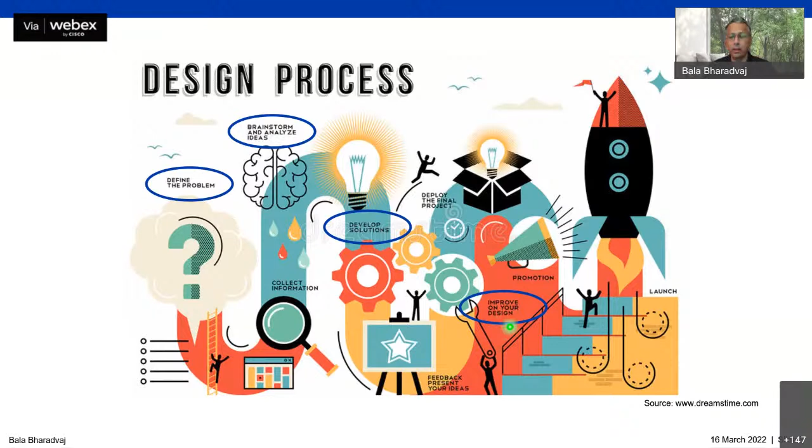Now, if you break that down further, when you say define the problem, what does it mean? How broadly or narrowly do you define the problem?

If I go back to the aerospace industry, early airplanes were designed more to deliver mail. There used to be mail delivery by stagecoach and horses and so forth. So they said that takes too long. If I make an airplane fast enough, which can travel maybe five times faster in those days compared to the horses, I can deliver the mail.

So the problem was defined as, I want to build a machine that will carry mail. Well, it's okay, that can carry some passengers too eventually, but carry the mail so it will go from place A to B. If that is how you define the problem, you ignore all the sustainability related issues. They say, yeah, I know it creates pollution, but that's okay because I can go there faster, and it's only a small amount of pollution, or whatever.

But today, knowing what we know, how broadly you define the problem will define what kind of solution you get. And in the context of sustainability, sustainability needs to be included in the problem definition.

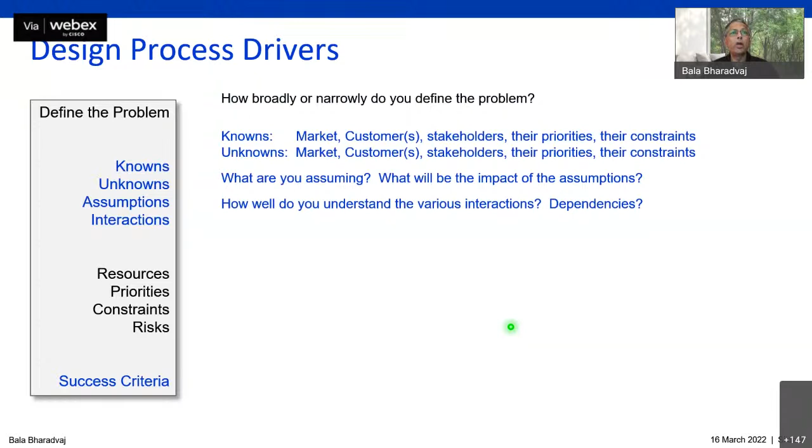Of course, there are knowns and unknowns related to the market, the customers, stakeholders. I'm saying stakeholders because the whole world is a stakeholder when it comes to environment and sustainability and so forth. And their priorities may not be the same as your priorities. As a business, as an engineer, you may have certain priorities, but that doesn't have to be the same for other stakeholders. So it's a combination one needs to understand.

Of course, everybody has constraints. They have constraints, we have constraints. We make assumptions, especially for things that we don't know. Do we think hard enough, long enough on the impact of the assumptions? If I assume something, it may be very convenient for me now, but do we really understand how things might unfold? How well do we understand the interactions and dependencies?

With respect to sustainability, if I make a better airplane, what is the impact on, say, the environment? If I come up with better software or a different way of doing things, what is the dependency? What else does it depend on? What depends on it?

Of course, we have to think about resources, and I'm using resources in a very broad sense. People are our fundamental resource. I'll talk about this again later. Knowledge, what do we know? How do we translate that knowledge into some applicable things? Technology, tools, when we talk about digital ways of doing things, tools become extremely important.

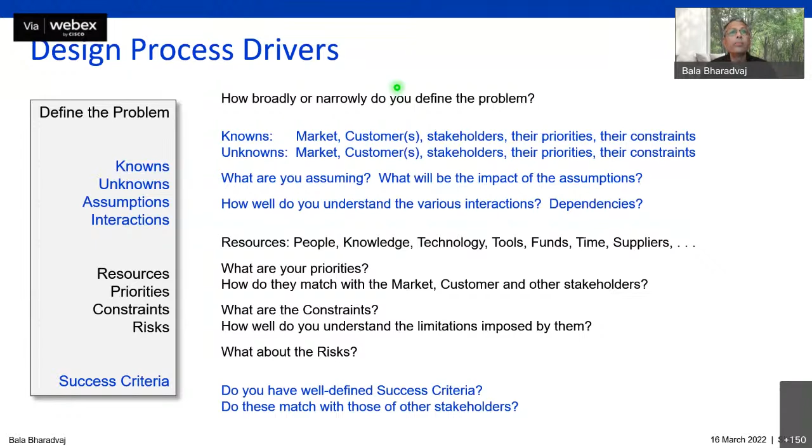Historically, from the early years, 1900s till about 2000, the process has evolved. Initially, it was just get the damn thing to work. Then we said, hey, I can develop commercial vehicles, military vehicles, all kinds of things I can make, which is what happened in, I would say, about 50 years or so.

And then people started realizing, oh my God, these things are getting very expensive. We got to find a way to manage the cost. And that is where we started talking about not just mission performance. We started talking about cost as an independent variable.

In fact, there are papers, cost as an independent variable. You can go look it up, and people started saying, we cannot just make something and say this is how much it costs. You have to factor the cost factor.

And then later on, people said, cost is not just the cost of making it the first time or making 200 of them the first time. You have to think about how you're going to maintain it over the long haul. So cost now became not just acquisition cost, but the total life-cycle cost. I acquire it, I maintain it, and then I have to dispose it. So I have to factor in everything.

And today we are talking about sustainability included. Now, sustainability inclusion doesn't mean all these things go away. You still want to achieve mission performance. You still want to achieve cost goals. Now you also have to think about sustainability and factor that into the mixture.

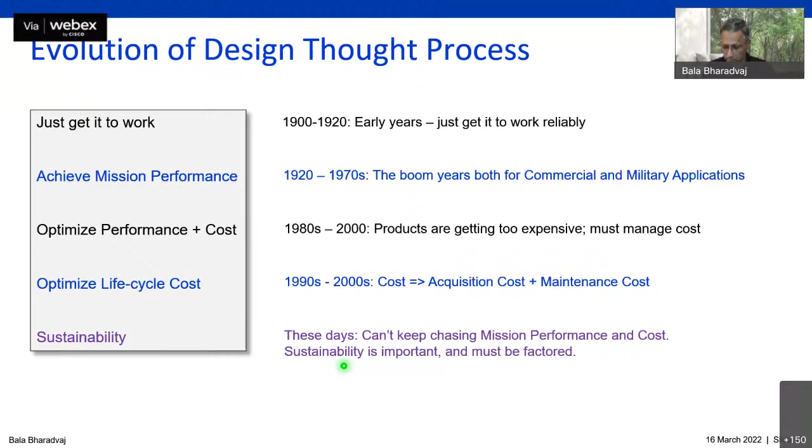So when you talk about the design performance, we talk about these things. So there are many things that come to my mind. You need to think about the system view of the environmental impact, for example. What kind of a configuration are you going to choose? Because the configuration determines how effective it might be.

What materials do you use? There's a huge effort in the industry to replace these toxic metals and heavy metals with alternatives. Where are your materials coming from? Are they coming from some place? Are these rare materials which are destroying the environment in the way you procure them? You get these materials out of the earth.

Recyclability, of course. Where is your fuel source? People talk a lot about using not petrochemicals, but let's say fuel that is made from plant sources, because they say the plants I can renew. But even then, you are still emitting. Whether I burn fuel that is coming from petroleum sources or from plant sources, I'm still creating emissions. So it has to be thought more holistically.

In the manufacturing process, we create damage to the environment. Mining has to do with sourcing of materials, and then of course all these things cannot be ignored. So it gets complex.

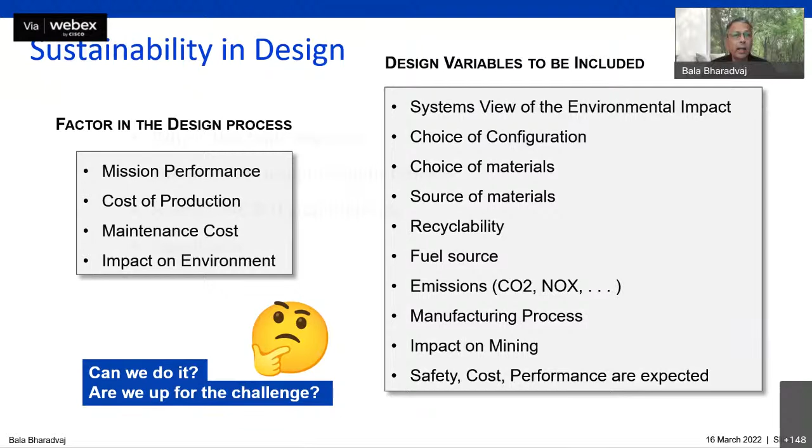So can we do it? I think we can. So let's talk about CAE.

CAE has come a very long way from say 1970s and 80s. We have aerodynamics, for example. We used to do a huge amount of wind tunnel testing. Today, people don't even talk about aerodynamics. Yesterday I was in a meeting, and every time the idea of, hey, is this aerodynamically correct? Immediately the answer was, oh, we'll get a CFD analysis done. So it's almost like people are not thinking aerodynamics anymore. People are thinking CFD, which I think to me is a caution.

Aerodynamics is a fundamental physical phenomena. CFD is a model of that physical phenomena. It has definitely helped reduce the number of wind tunnel tests that we used to do, but then the physics is getting out of our heads. The physics is getting replaced by tools and numbers.

Same thing with structural design. Huge amount of benefit from structural analysis tools. Cockpits and control systems have all benefited hugely from the models and digital multifunction displays and so forth.

Same is true in the area of propulsion. There used to be a time when it was more of an art than a science. Today, of course, it leverages many of the tools from the digital side, from the computer-aided engineering side.

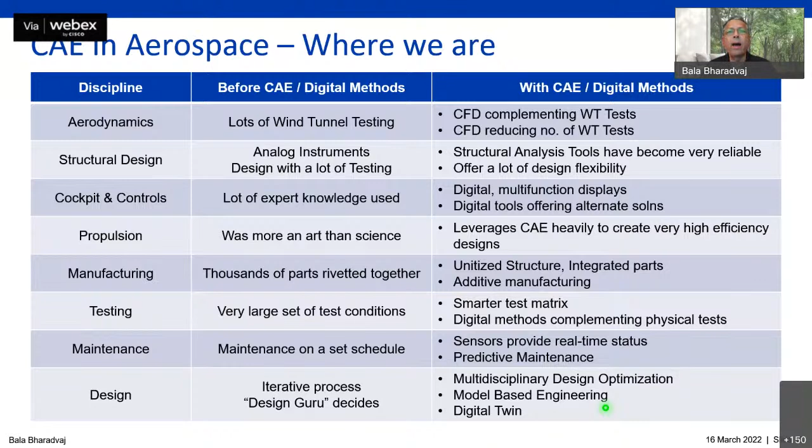Today we are talking about model-based engineering, digital twins, and so forth. But the question that comes up in my mind is, are these models we are creating factoring in all the key things that have to be factored? That's the concern I would have. We've come a long way, but there's a little nagging concern in my head. So the good news is, can CAE come to the rescue and help us out in this area?

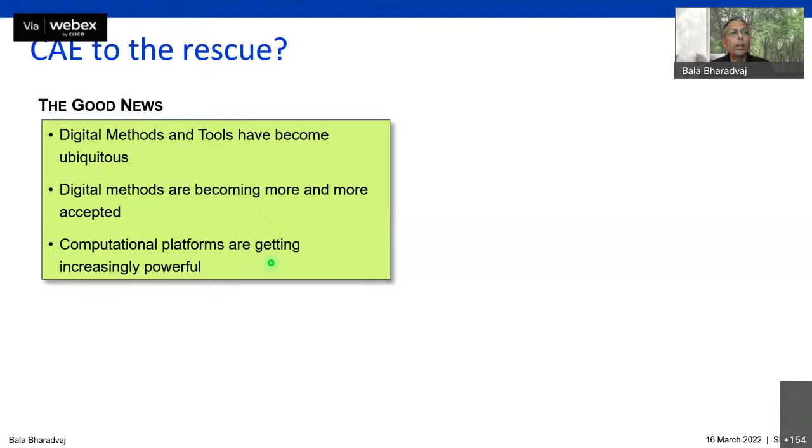I think digital tools and methods have become ubiquitous. Everybody uses them now. It wasn't that way, but they have earned their way and become more accepted over the decades. The good news is all these required computing platforms have also become increasingly powerful, whether distributed computing or cloud computing. The computing power available today enables us to do things we could not do even 10, 15 years ago.

Now, the caution I will leave you with is that it is crucial, it is very, very important, that these tools are reliable. And when I say tools are reliable, it's not only the tools. Of course the tool itself has to be reliable, but it's a combination of the tool and the user. It's also how extensively the tools have been validated, under what kind of conditions. Have you simply looked at simple conditions which people understand? Have you looked at complex conditions? Do you have proof that even in complex conditions it works?

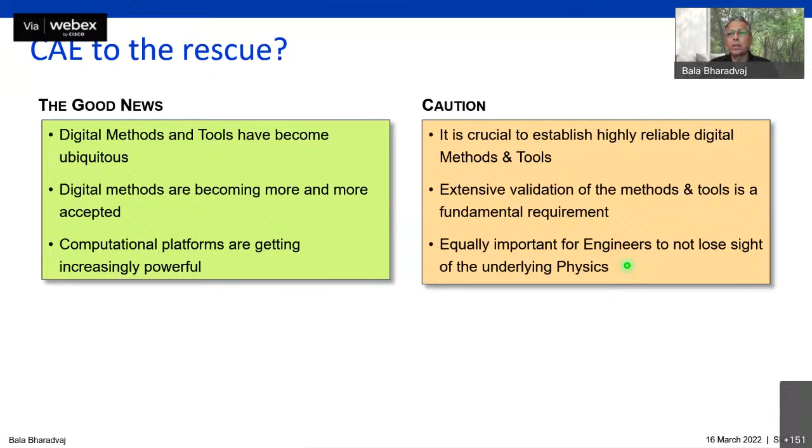Tools alone don't design anything. It's a combination of people and tools, along with the process, that designs things. So it's very important that engineers do not lose sight of the underlying physics. Use the CFD, use the design tools you have, but don't forget that CFD is a model for aerodynamics. Certain things can be modeled easily, certain things are very, very difficult to model. One needs to always keep this in mind, that you should not lose track of the physics.

So my observation is that a good engineer can create an outstanding design even with simple tools. However, if you are a mediocre engineer, you can actually ruin the design even if somebody gave you the most fantastic tool. So while the tools are very important, the engineers are even more important.

So those of you, especially younger engineers, don't come and say 'I know how to use this tool' - that's wonderful, but that's not the sufficient condition. That's a necessary condition these days, that you know how to use a particular tool. The sufficient condition is I not only know how to use the tool, but I understand what this tool is telling me. I know how to look at the data, I know how to extract the kind of information, I know what questions to ask when using the tool, so I can extract that information with the help of the tool.

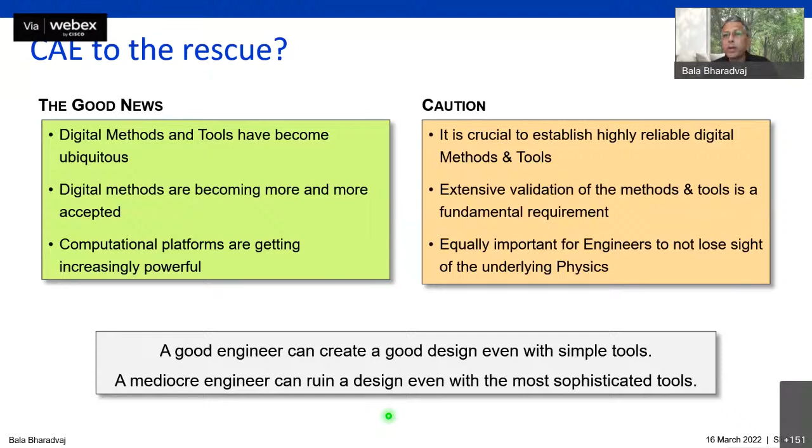Last chart - sustainability is becoming a requirement in aerospace, definitely. Digital methods and tools offer a way for us to tackle this, but I can't re-emphasize enough the importance of the people in the mixture. They must strengthen their insight, and insight is something that develops over time. So whether you are an individual engineer or an organization with engineers, it's very important to figure out ways to develop that insight, because the tools will help you, but eventually the buck stops with the human being and not with the tool.

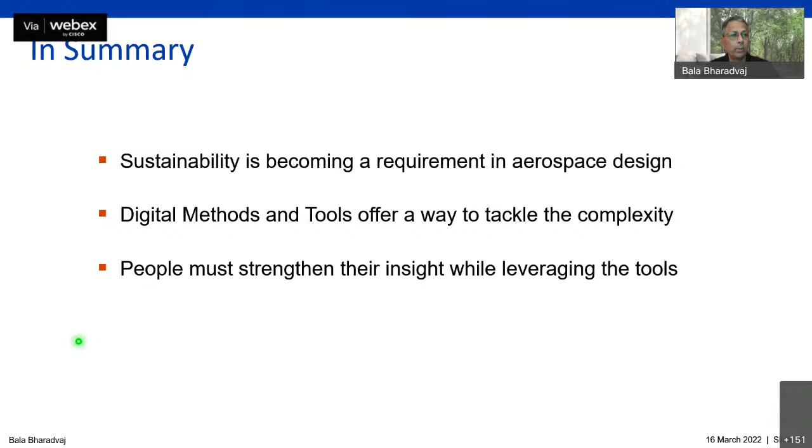With that, I will close this presentation. Thank you again for giving me the opportunity to speak. I don't know whether we'll have a chance for Q&A - it may not work right now, but I will be around if there are questions to answer. Thank you very much.

Seeing my screen now? Yes, it is perfect, doctor. Yeah, go ahead. Apologies, yeah, thank you for stopping me.

The impact of humans on the environment has been well quantified, and it manifests in different considerations, from temperature increase to pollution to water issues and global warming. But when we look at what impact commercial aviation has, it is a small piece of the pie, but a significant piece, and that's what we're zooming in on today to see what we can do to mitigate that impact.

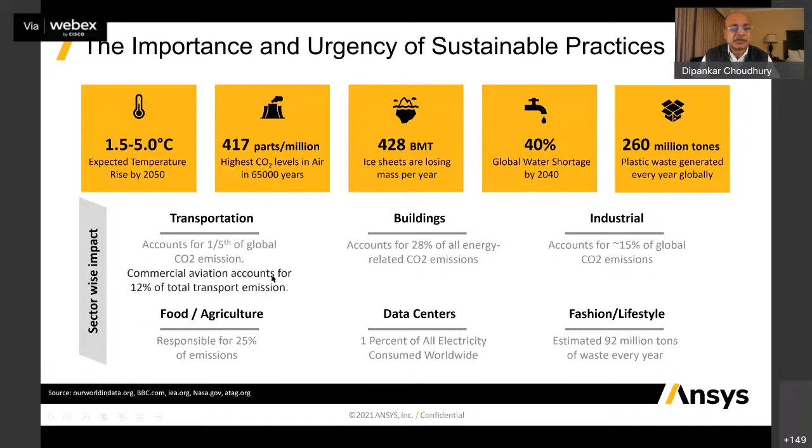The aviation industry, as Dr. Bharadvaj pointed out, is very keen to deal with sustainability as a root issue right at the design phase, because of the benefits in transportation that result in more and more use of planes, which in a not-so-virtuous circle produces more waste, more pollution, more greenhouse gases. So when we try to drive towards net zero emissions by improving efficiency, while keeping our eye on safety and reliability, the challenges become very complex.

They do not—is somebody getting audio feedback from somebody else? Okay.

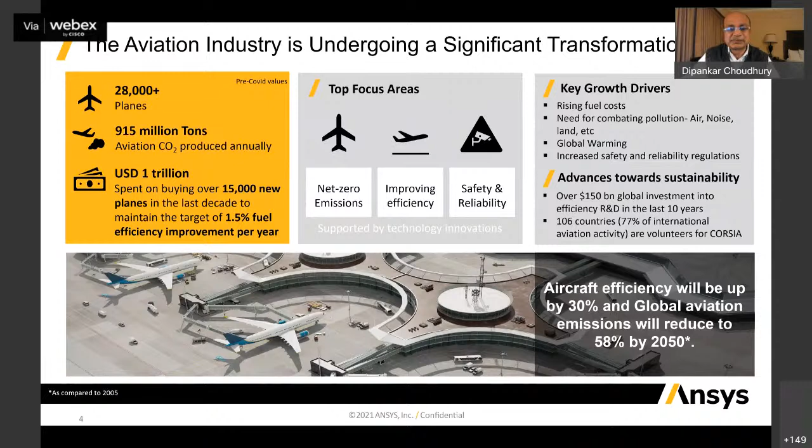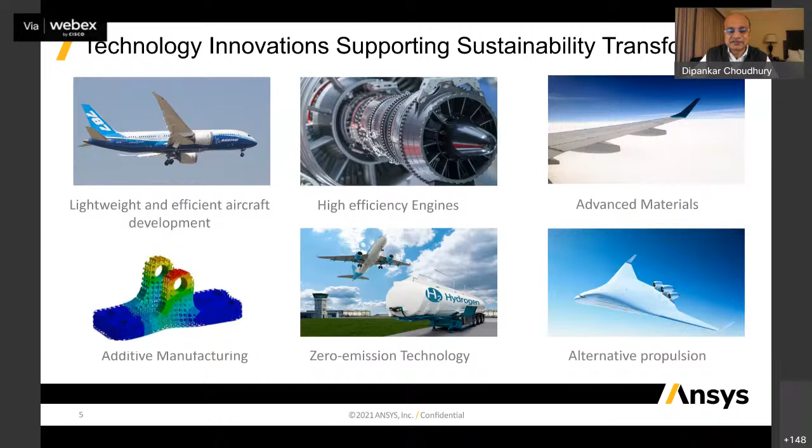Thanks. The goal we have set ourselves as an industry is to improve aircraft efficiency and reduce emissions simultaneously. That's quite a steep challenge, but it's clearly in our minds. There are six or seven ways one can directly impact that, and that's what our customers and partners are working on: efficient aircraft designs including lightweighting, high efficiency engines, advanced materials that play into virtually all aspects of aircraft design, more efficient manufacturing methods, technologies that result in lower emissions driving towards zero emissions, and very radical propulsion methods and designs that are somewhat futuristic. Conceptualizing, designing, and developing these futuristic alternatives is a little bit far off, but even today all the practices I've described are having an impact.

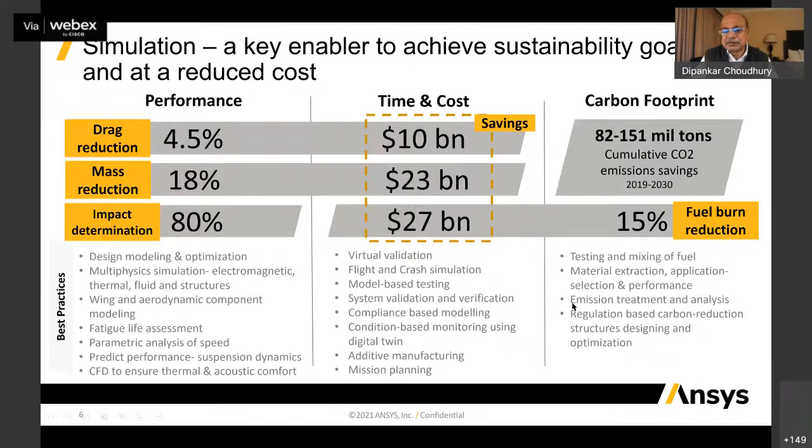Okay, I'm going to skip ahead. I think you know about Ansys—we are a premier simulation provider, and the tools and methods we have invested in over the years have grown from the discipline areas of structures, fluids, electromagnetics, optical physics, and design methods and photonic simulations to supporting methods that can be looked at from the point of view of optimization, digitization through production of digital twins, safety and embedded software, the very important aspect of materials—not just the data but the management of the data—and then how it manifests itself into solutions and industries.

I want to turn to the last part of my presentation and show some examples of the effective use of engineering simulation methods in different domains within the aircraft industry. One clear successful application is reducing environmental impact of noise, through a bunch of tools—not just computational fluid dynamics, but also linking it to noise and vibration analysis in structures, and then translating the simulation data into human audible simulation that can actually be perceived by our ears. These innovative simulation methods, based on the power of the methods themselves and the platforms that Dr. Bharadvaj also pointed to, have resulted in many benefits throughout the industry. You can see some of the benefits listed and quantified, with some quotes here. To the right, you see some typical applications of engineering simulation to landing gear and other aircraft systems.

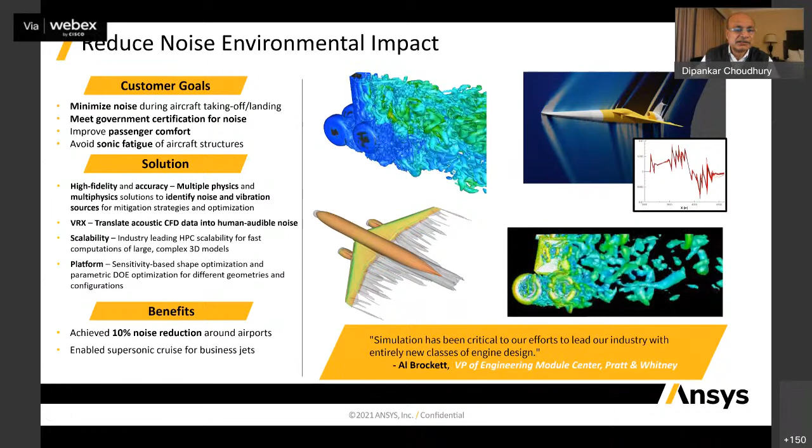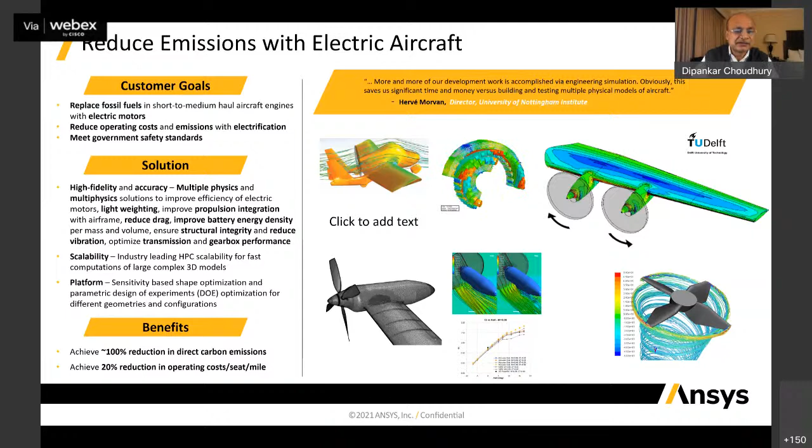Another area that is very big in terms of investments in engineering simulation is electrification, and of course the focus here is mostly short to medium haul aircraft. The idea is to use a variety of physics-based simulation methods by harnessing CFD, electromagnetics calculations, and systems modeling, putting the detailed 3D simulation results in the context of an entire system. The benefits being realized are very, very significant, and if these innovative designs can make their way to operating aircraft, the benefits will be very large.

On the side of fuels, the idea is to use methods like fuel characterization and selection of blends. These can be simulated nowadays with tools like Chemkin and the Model Fuel Library, which characterize more than 60 or 70 different types of fuels. The end result is that we can combine these simulation methods to produce predictions of how the operational behavior of the fuels would be, from an emissions and efficient combustion characteristics standpoint.

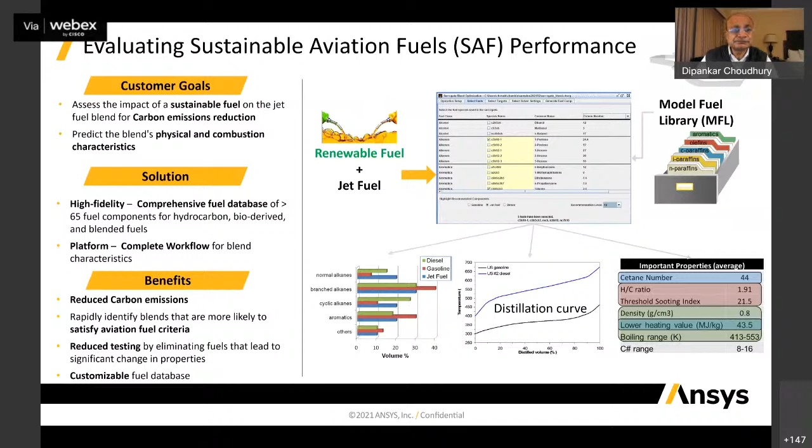In a very futuristic way, hydrogen combustion modeling is seeing a lot of application of computational methods, CFD and related methods, where we understand and use these very powerful modeling methods to predict how combustors that utilize hydrogen can actually work in an operating aircraft, including the challenges of the specific volume to energy release of hydrogen.

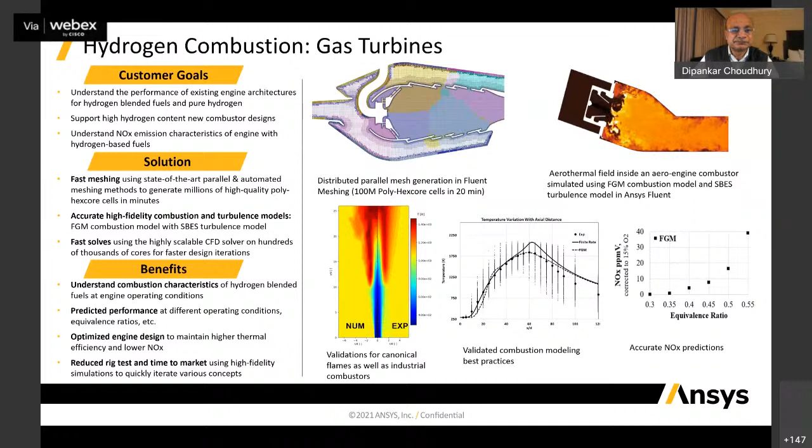Aircraft drag, of course, is one very direct way in which sustainability characteristics can be improved by reducing the drag, reducing the fuel burn, and also increasing the economic impact of these higher efficiency designs.

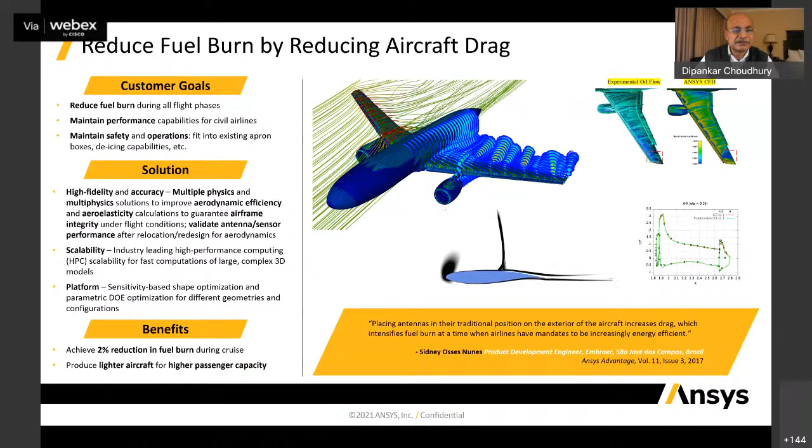Material management is a huge part of a design, and engineering simulation methods can enable that with the use of materials information management systems like the Granta design systems, where simply gathering the data and making it available to design engineers makes a more efficient workflow within the design practice, and certainly reduces the possibility of wastage, and includes the traceability of the materials right from the entire life cycle of the product.

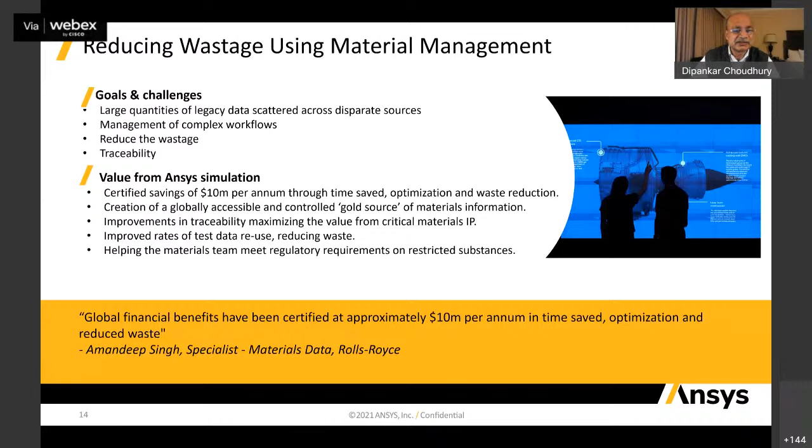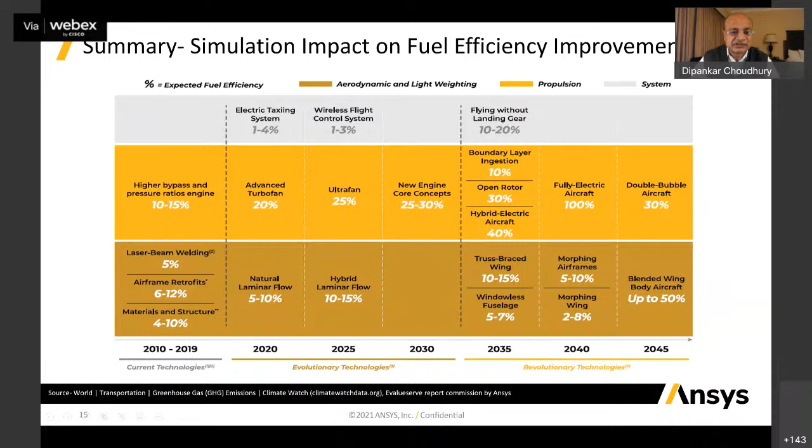One thing I wanted to close with is to point out that yes, large customers and enterprises are using engineering design methods and tools like ours. And one would think that they are the only ones able to use it, and that's not entirely correct, because a lot of innovation, especially in the arena of sustainability, is happening in small and startup industries. We have actually increased the footprint of engineering simulation methods by having very attractive programs where we commit to startups and get them started up with these design methods and tools by providing easy access, training, and so on. So we've been very successful in getting small companies going as well in this arena across the world.

So the main points I would like to leave you with in my talk is that the goals of improvements in sustainability and the ambitious targets we have set ourselves are really challenging. It requires really innovative solutions and a transformation of processes and existing methodologies in the industry. These can be very time consuming and indeed sometimes cost prohibitive. But engineering simulation does play an important role by helping this transition process. The buzzword is digitalization, but that's a very key part of what simulation can do for us. And accelerating the pace of progress, I think we'd all agree is a very laudable target.